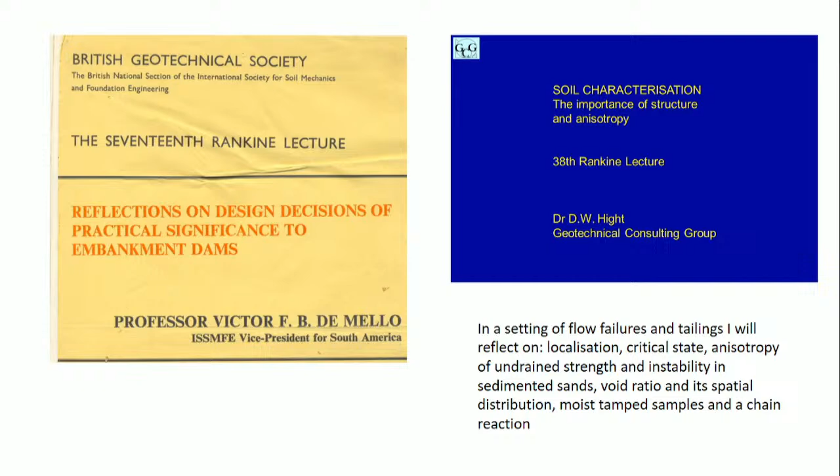Lewis and Tiago Diaz at my office, GCG, helped me find a quote from Victor related to tailings dams.

He said this in 1980, which is worth bearing in mind compared to what's happened since in the world of tailings. He said, 'To sum up, I allow myself to say that in the case of water dams, our experience has been so positive that the future invites the indispensable optimization of economics. On the other hand, when it comes to tailings dams, very justified are the concerns that, with time, the raises and the multiplication of diverse cases, the invitation to unpleasantness and failures is open and with a free ticket. We are only at the start, which favors us. Let us do the reconsiderations and revisions that the subject and the gravity of concern demand.'

I think this is pretty prophetic that he made that statement in 1980.

When I went back to my Rankine lecture, I realized how much speculation there was in it. In fact, I had some of the slides titled speculative. You'll recognize slides I've taken from the Rankine lecture because mine was the last lecture to be given using plastic slides, so they have the obligatory blue background.

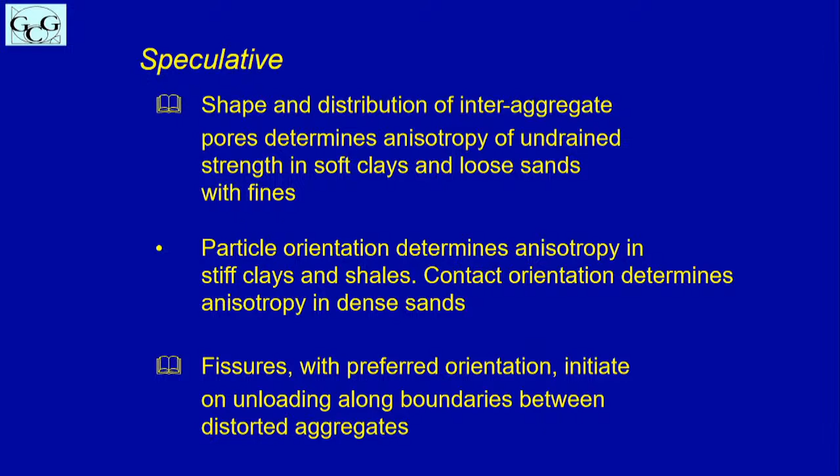Just to show the interest I had in those days with fabric, this was an SEM of the Bothkennar clay, the soft clay we tested at Imperial and various other universities. And I was always interested in these very large interaggregate pores that you can see both in the photograph and in the sketch.

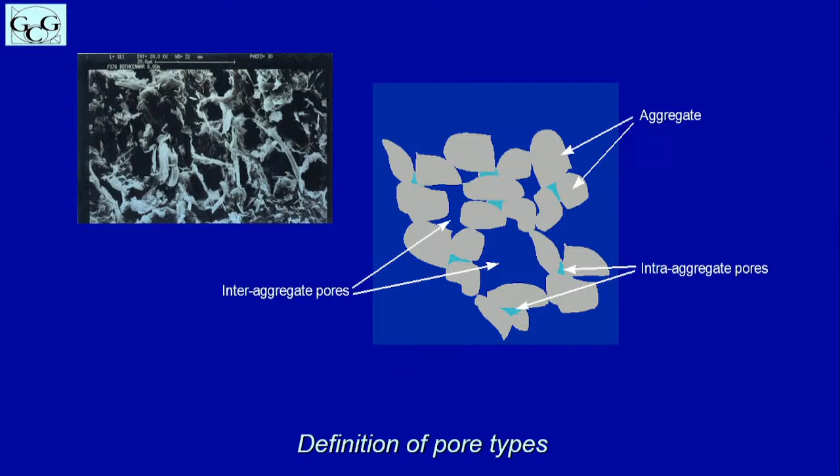It was this interest in macro voids and the void distribution that led me to suggest that it was this actual presence of the macrovoids in their shape that determined the anisotropy of the Bothkennar mottled clay.

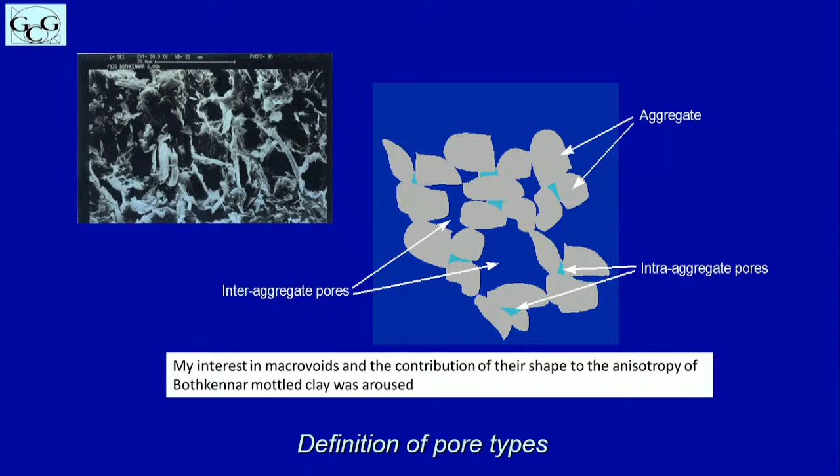For the benefit of a couple of ladies in the audience who won't have a clue what I'm talking about, I have these two diagrams. On the left-hand side, I have some densely packed spheres, and shearing of that dense packing requires particles to rise up and climb over their neighbors — this is dilatancy. Shearing of a loose packing on the right causes particles to nestle closer together — this is contractancy. The nestling together in Welsh is cwtch, I believe.

Thank you for the confirmation.

Another point that may be helpful is that shearing of loose and dense packings under the same confining stress ultimately brings the spheres to the same packing or density or void ratio. The voids between particles can be filled with water or air or a mixture of both. If filled with water that cannot escape when sheared, the pressure in the water increases if the packing is loose and tries to contract, and that pressure reduces if the packing is dense and tries to dilate.

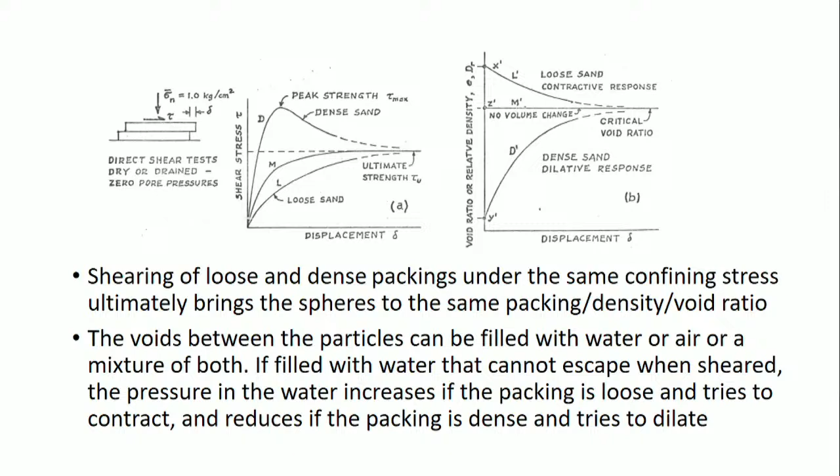So that's simplicity for soil mechanics, but the problem is particles are not spherical. They vary in shape and size. Their packing is not uniform at the same global void ratio. The figure on the top right is taken from a pretty old publication by a gentleman called Mogami, who shows that you can get two entirely different packings of the same number of particles, and you can introduce these macro voids. So the packing is not uniform.

Also, the soils have a fabric, an arrangement of particles that results in their properties being anisotropic, that is, varying with direction. The fabric, and so the anisotropy, changes or evolves during shearing. So we're not talking about a constant situation — as we shear, we change the properties.

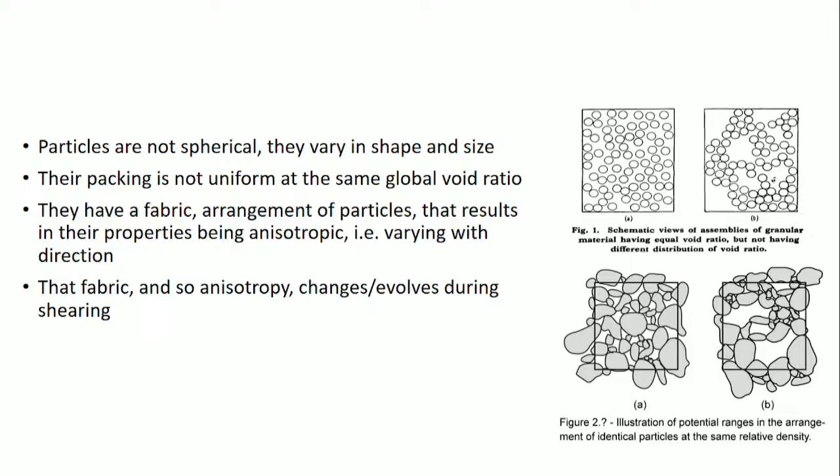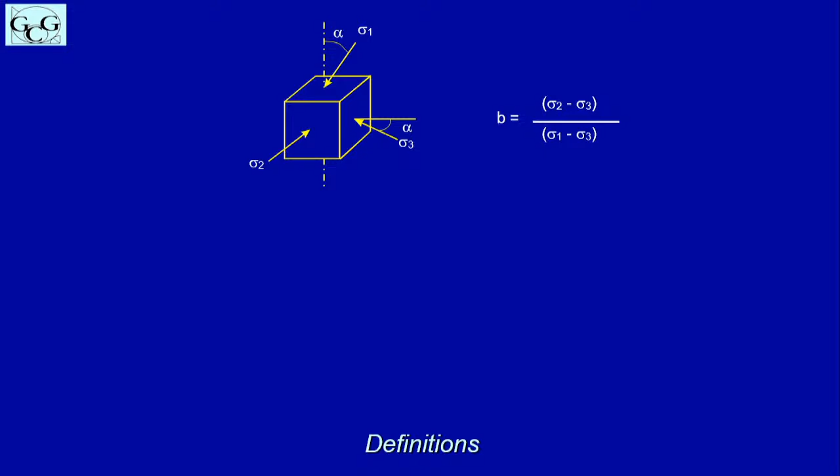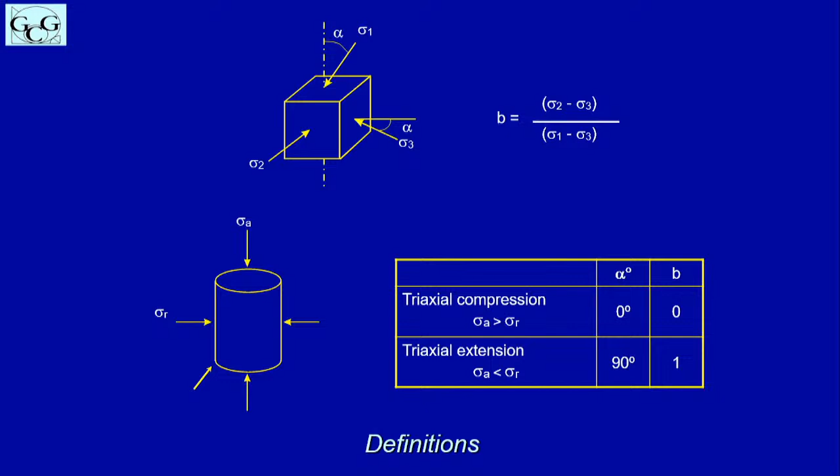So the same definitions I used in the Rankine lecture, I'll use now. The major principal stress, sigma 1, is at an angle alpha to the vertical, and the relative size of the intermediate principal stress, sigma 2, is given by the parameter small b. In a triaxial compression test, which we'll talk about, alpha, the major principal stress direction, is 0 — it's vertical — and B is 0. In triaxial extension, alpha is 90 degrees and B is 1.

Discrete element modeling predicts the displacements and rotations of discrete elements which represent idealized rigid soil particles. It provides information on forces at particle contacts, and the development of strong force chains or load columns. It enables explanations of macroscale observations in terms of particulate microscale behavior. It provides reassurance on the validity of observations made in laboratory tests on soils, such as phase transformation, and the effects of B and alpha, as observed in the hollow cylinder apparatus. It gives confidence in our understanding of instability and critical states. It supports intuition, and it corrects speculation.

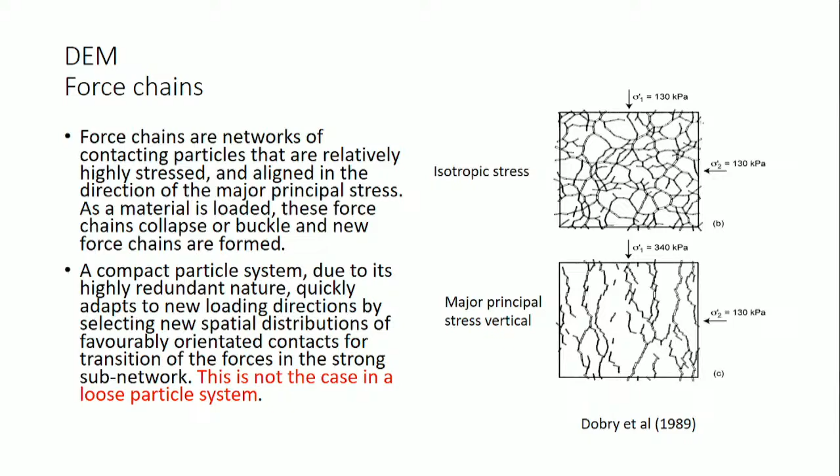Work done by Barreto showed that these force chains vary as you vary the parameter B, the value of the intermediate principal stress. So the value of B influences the force chains that develop because of its changing effect on the lateral support to the force chains. This is valuable when trying to understand what happens at critical state.

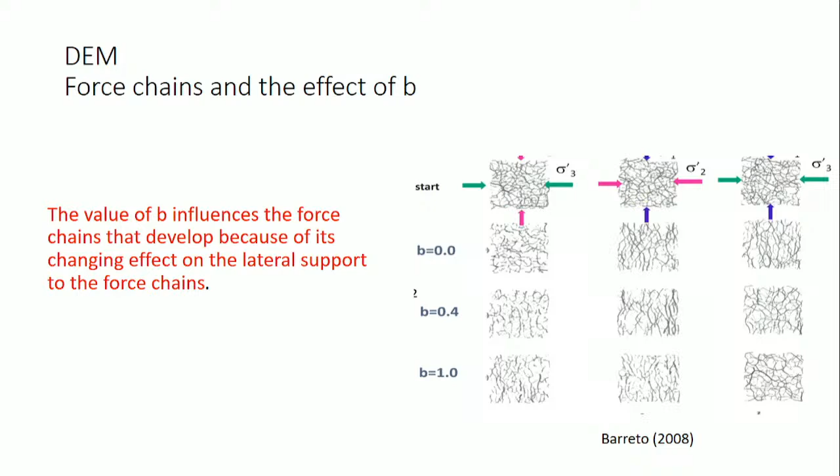The quasi-steady state. In the late 70s at Imperial College, a research student, Dr. Mustafa El-Gamrawi, was sent back to repeat his tests 2 or 3 times by the learned professor there, who didn't believe what he was observing in terms of what we now refer to as the quasi-steady state or the phase transformation.

A 2D DEM study by Yang and Dai shows that the quasi-steady state is a real behavior rather than a test-induced phenomenon. It's a transitional state in which spatial rearrangement of discrete particles sheared under constant volume conditions leads to the average number of contacts per particle decreasing to a minimum value before increasing gradually, and after that to an approximately constant value at large deformations associated with a steady state.

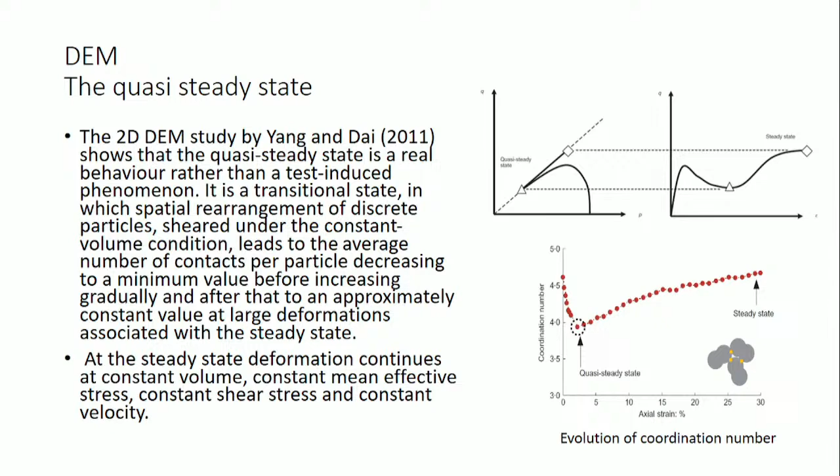At the steady state, deformation continues at constant volume, constant mean effective stress, constant shear stress, and constant velocity. So his work really reinforced what we thought we knew from our experiments.

I'm going to refer to the insights that it has provided on strain localization and particle movements during shear.

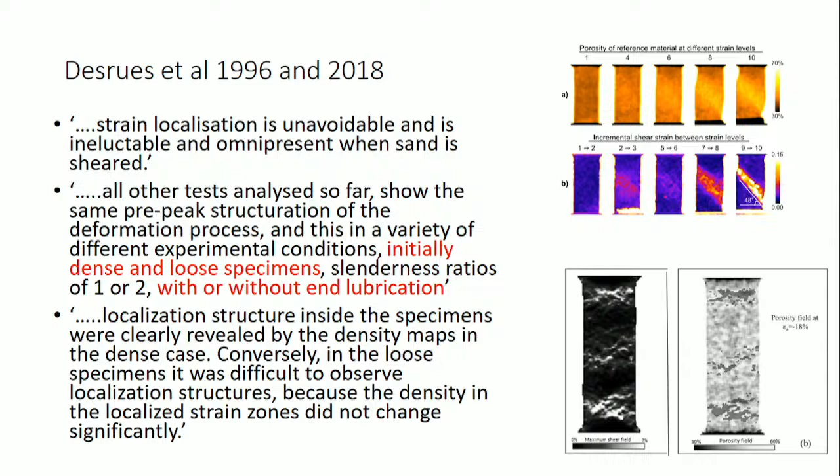He also pointed out that localization structures inside the specimens were clearly revealed by the density maps in the dense case. Conversely, in the loose specimens, it was difficult to observe localization structures because the density in the localized strain zones did not change significantly. So it's not to say they're not there. In fact, they are there—it's just more difficult to observe them.

So what does localization mean? Well, in dilatant soils—soils sheared from a dense state—dilatancy concentrates in a shear band, causing weakening in drained and slow undrained tests when pore water is drawn into the shear band. In fast undrained tests, pore water migration cannot occur and undrained strengths are higher. This was pointed out by Sandro Sandroni in 1975.

In drained tests involving dilation, decreasing stability is accompanied by reducing coordination number. The contacts are diminishing.

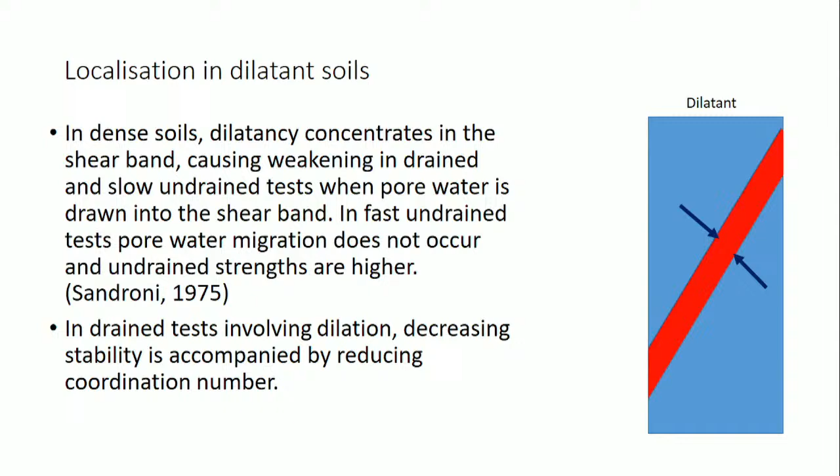But it's important to accept that localization occurs in contractant soils too. Localization does develop in loose contractant soils, but it's difficult to observe, and it's self-healing in drained and slow undrained shearing, when locally higher pore pressures can dissipate out of the shear band. Under rapid undrained loading, the shear band cannot drain. Straining is concentrated in the band and the strength is reduced.

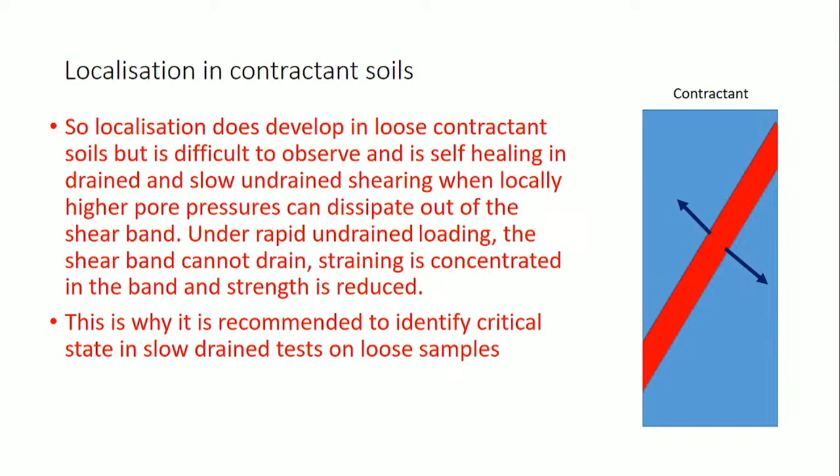This is why it's recommended to identify critical state in slow drained tests on loose samples, where the effects of localization can be minimized.

On the top right, the two figures compare DEM predictions of localization. The one marked A is a test carried out with end restraint, without lubricated ends. The test on the right is idealized testing of the same material, with lentil-shaped grains, showing that there is some localization, but much less when you don't have end effects in your triaxial test and when you're not using mixed boundaries.

The bottom diagram is pretty typical of what happens in triaxial compression. Shear banding of standard-sized triaxial samples can be distributed to such an extent that the sum of all the mechanisms does not show up in observations of the outside of the specimen. The more or less cylindrical or barrel-like shape of the axisymmetric specimen strained in laboratory tests may conceal internal complex structures involving strain localization.

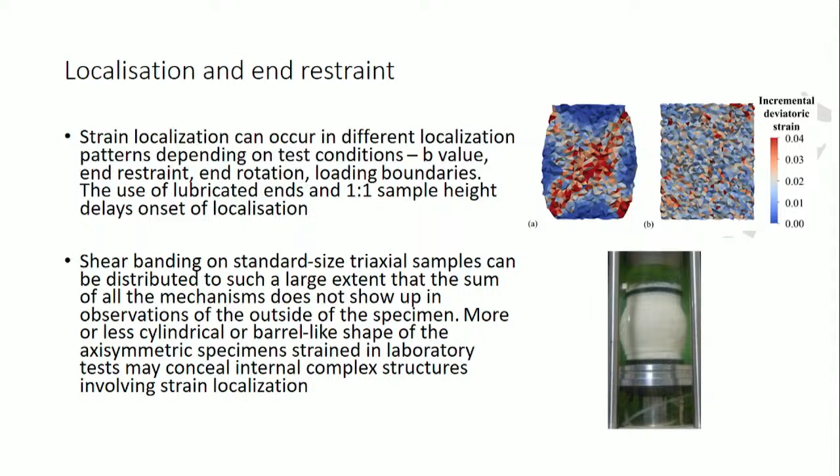That's effectively another quote from Professor Desrues. So what are the triggers for strain localization? Is there any stage we can look at where we're not impacted by it?

Non-uniform dilation or non-uniform pore pressure generation and equilibration can be a trigger. Stress non-uniformities associated with boundary conditions, end restraint, mixed boundaries, platen rotation, eccentricity in vertical alignment, stress concentrators such as fissures or other flaws—and I've highlighted the next one, heterogeneity: initial and evolving variations in void ratio. If you're testing a sample which doesn't have uniform void ratio, you almost certainly will have localization. What I want to show later is that you always have these non-uniformities in void ratio.

Failure of a local strengthening agent, such as cementing, suction due to menisci, negative pore pressures leading to cavitation—they can all be triggers. Orientation of platy particles can lead to localization. Loading direction, as we'll see, is important, and grain rotations seem to be a trigger for strain localization.

I just wanted to mention this statement from a piece of work by Wang and Gutierrez. They said that global failure along the primary shear band prevails when the specimen length scale and length-to-height aspect ratio are small, while progressive failure becomes more likely when the specimen length scale and aspect ratio become larger. So localization introduces a scale effect.

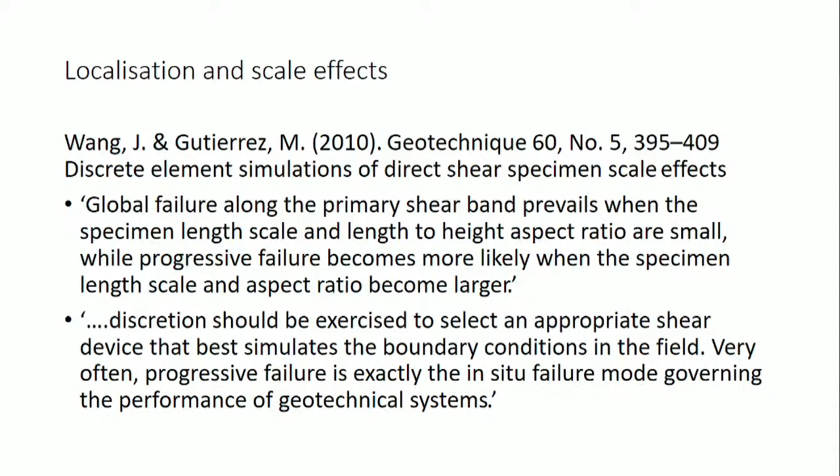They went on to say that discretion should be exercised to select an appropriate shear device that best simulates the boundary conditions in the field. Very often, progressive failure is exactly the in situ failure mode governing the performance of geotechnical systems. This is interesting because we spend our lives trying to avoid localization by using end lubrication, by doing all these clever things. They're now suggesting don't bother, just run tests where you get localization and try to interpret the data from those. I'm not sure.

So, changing topics now to critical state. I want to look at: is the critical state line nonlinear in E log P dash space? Does it depend on this parameter B? Does it depend on alpha? Is it actually attainable when you take into account particle shape and packing?

On the left is the data published by Verdugo showing phase transformation lines and the ultimate steady state. He found that it wasn't a straight line in E log P dash, it was curved, the curvature developing as the void ratio increases, as the material becomes looser. But I want to point out that he ran these tests on moist tamped samples, and I'm suggesting that at those high void ratios, there is important void ratio spatial distribution.

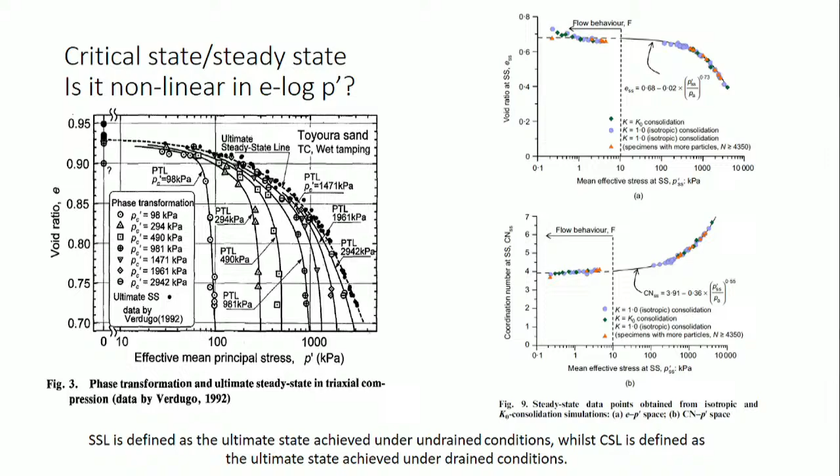This finding was confirmed by DEM work shown on the right-hand side by the group in Western Australia. So that's encouraging that the surface is curved. So I will adopt a curved surface later on.

Does it depend on B? Well, we talked about force chains. Force chains exist at critical state. They've been observed again in DEM studies. So it's reasonable to assume that the critical state depends on B. At critical state, force chains continuously form and collapse and reform. So at critical state, there's simultaneous dilation and contraction.

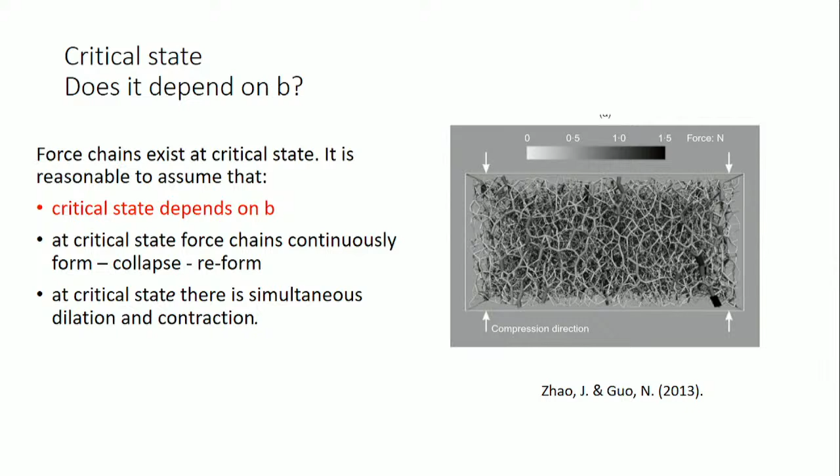However, some more work on microcomputed tomography suggests that actually there is no difference. If you can look inside the shear zones, the shear bands that are occurring, then the critical state lines come together, as opposed to the dark points being two separate critical state lines, one for compression, one for extension. The upper solid line is formed when looking inside these shear zones and measuring the void ratio. I'm still not convinced by this, but I'm not sure you know exactly what's going on in those shear zones in terms of the B value.

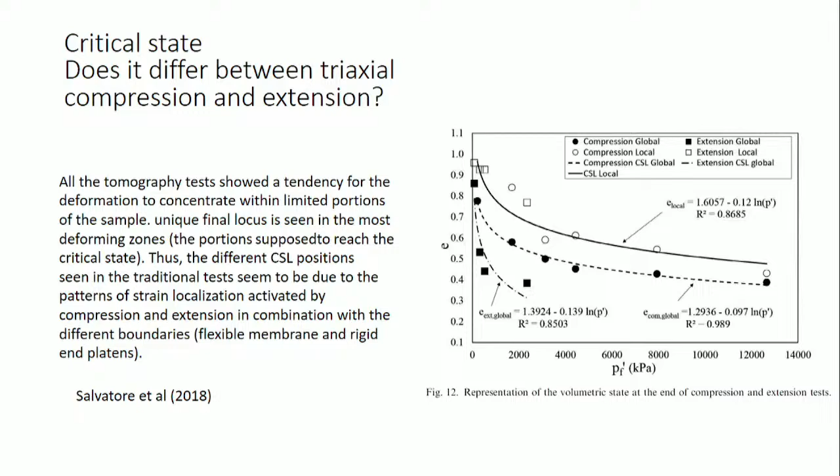Does critical state depend on alpha? These are some pictures of particle orientation at a very high shear strain of 400% from Carrasco et al. And it's very clear that at critical state an anisotropic fabric develops. Elongated or platy particles align relative to loading direction, as do load columns, even in shear zones. If the loading direction is changed, for example if you decide to rotate the principal stresses at critical state, the particles must reorientate, and the soil must undergo volumetric deformations to reach a new critical state. But is this feasible? Pre-existing particle arrangement can dominate subsequent behavior, and we'll look at that when we look at the effects of bedding in a subsequent slide.

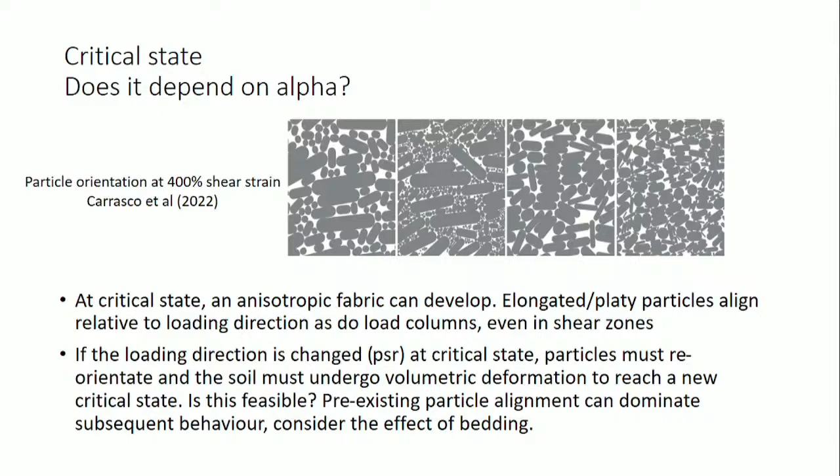So continuing this question, is it attainable? If you consider localization, the early work by Professor Desrues in 1996 said that critical state is particularly well verified inside the observed localized band of deformation rather than the average of a complex strain field. Using his microcomputed tomography, he was able to look inside the shear bands, and he found that the curves came together for these loose and dense samples. The work was only done in triaxial compression.

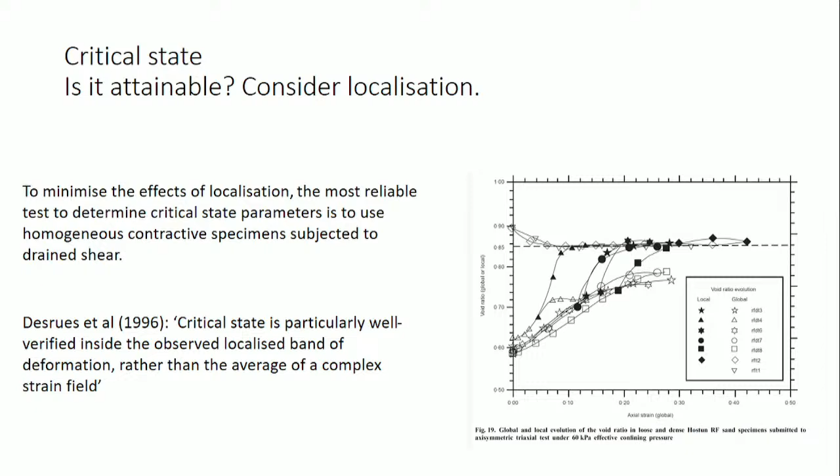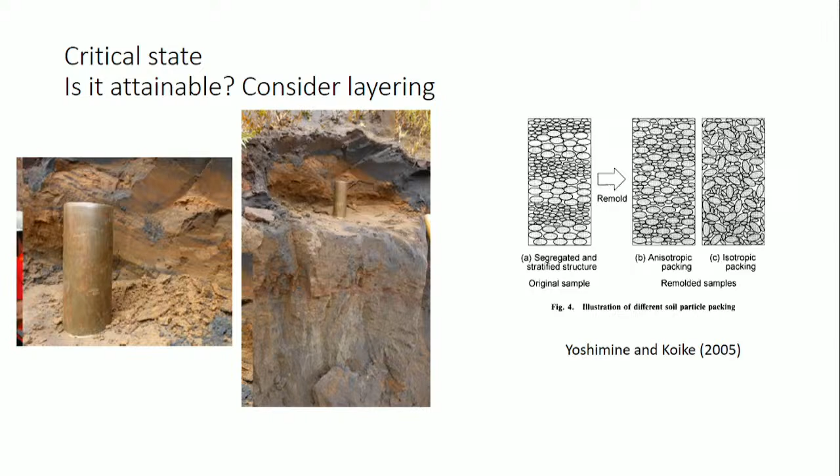So let's look a bit more closely at layering and what happens. I'm looking at work published in 2005 by Professor Yoshimine and his colleague.

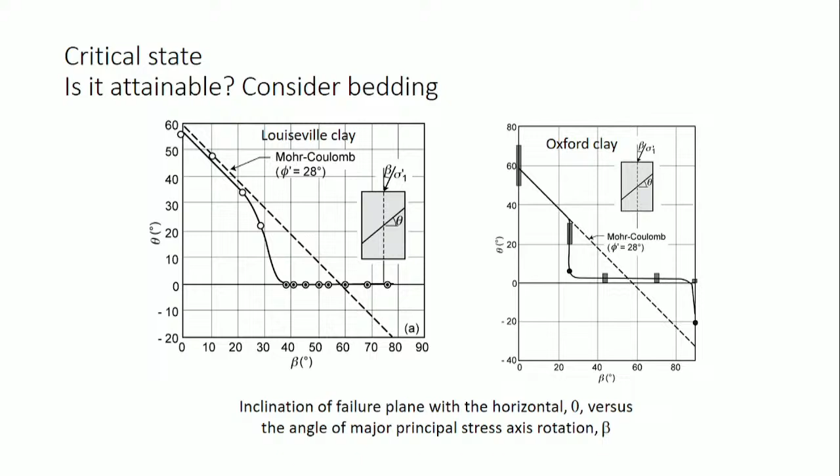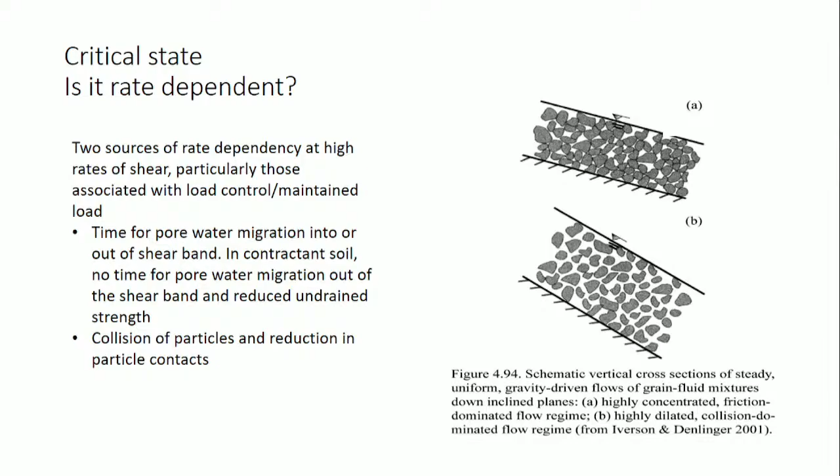Why don't we do more load-controlled testing? Because that's what's so much more relevant in the field. I looked at what people said about this, and I kept coming to the statement that deformation-controlled loading has been recommended in the past to allow post-peak behavior to be observed. Well, that's the post-peak behavior under strain-controlled loading, not the behavior we should be interested in in many cases. And the strength in these load-controlled tests is pretty poorly defined, yet that's the one we're interested in for certain methods of analysis. Going back to the work of Professor Wade, he said that only an inertial system can capture the true strain-softening response of sand.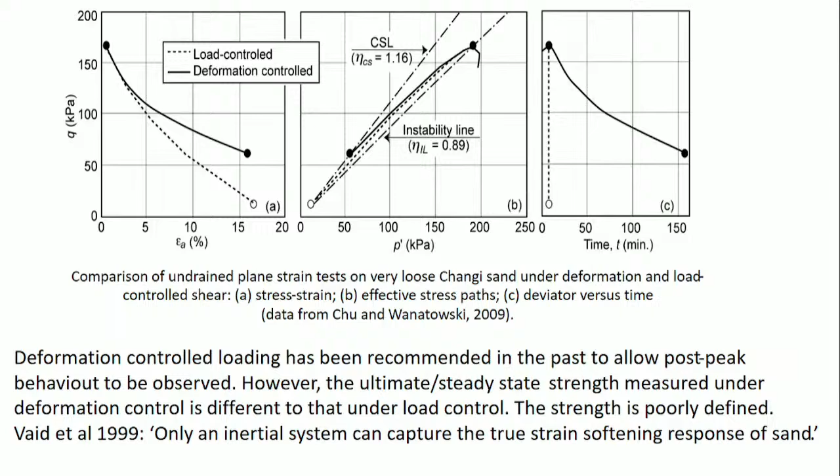Okay, back to the Rankine lecture now, just for a couple of minutes, on anisotropy of water and air pluviated loose sands in undrained shear. This was data we published, it was in Satoru Shibuya's thesis in 1985, where we tested water-pluviated Ham River sand in the hollow cylinder apparatus, shearing it with different directions of the major principal stress to the vertical. The numbers on the right are the values of alpha in degrees. These tests were run with the parameter B equals 0. So you can see a major influence of the principal stress direction when you're shearing these sands.

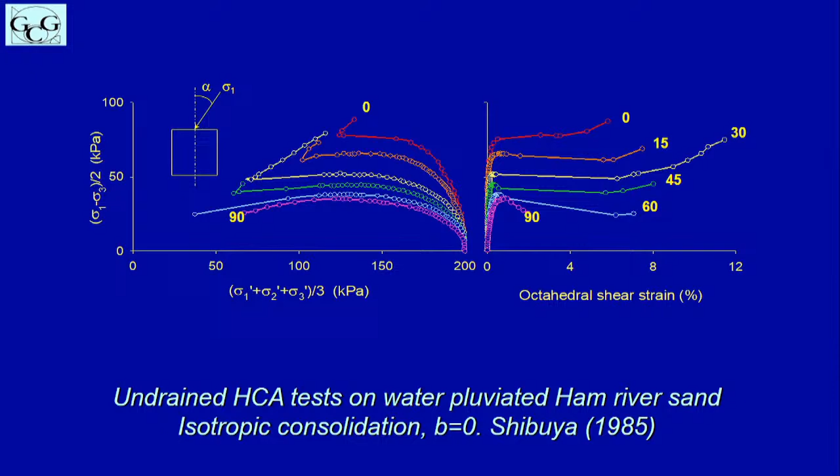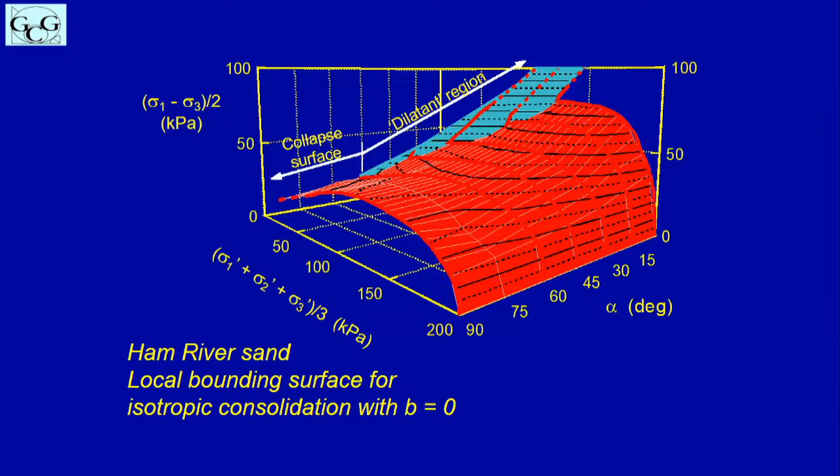The other thing we suggested at that time was to stack those different effective stress paths together in a three-dimensional space, so that you can actually identify what we then called the collapse surface and the dilatant region.

That slide was actually presented in the Rankine lecture in 1998. 1998 was a bumper year for data on hollow cylinder tests. I've just taken two of them. This is data for Toyoura sand, published by Yoshimine in 1998. He did this test with a B equals 0.5 and found exactly the same pattern of behavior that we'd found in the Ham River sand.

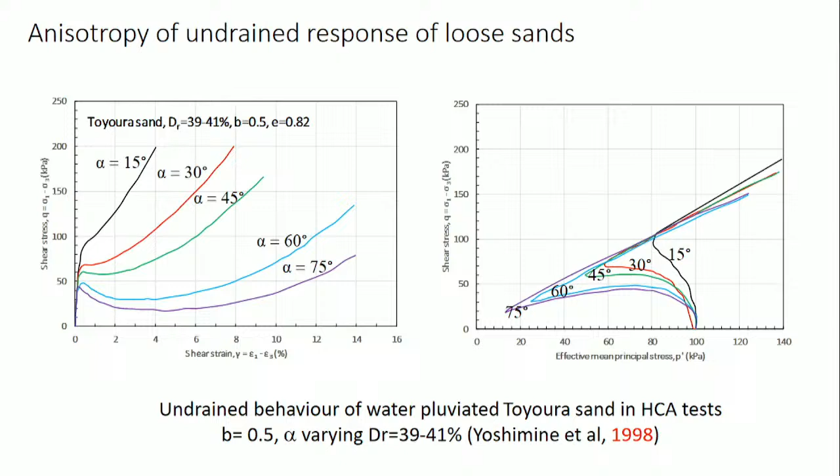If you look at the stress strain curves on the left, and compare the tests at alpha of 15 degrees against the one at alpha of 75 degrees, it doesn't seem likely that they're heading for the same critical state. But of course, they're not going to get to the critical state because of localization, which is inevitable in the hollow cylinder tests.

Another set of data, this time from one of Vaid's students, showing again the same pattern on a different sand at different relative densities.

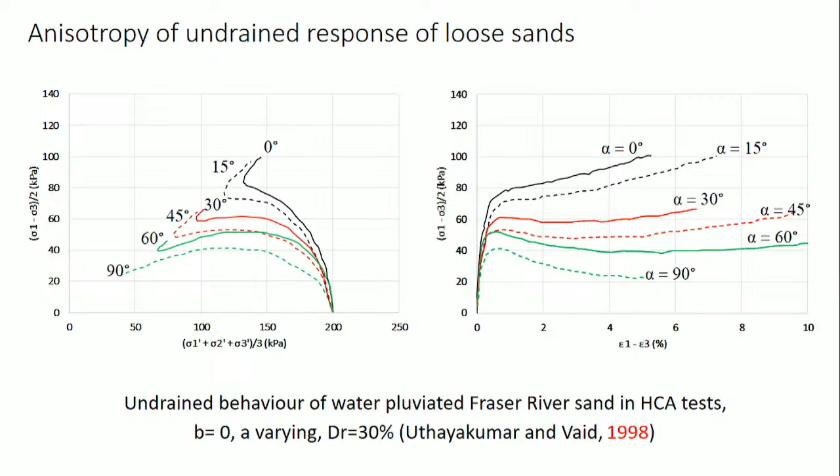So another one of my speculation slides: geomaterials show anisotropy of stiffness, strength, collapse potential and permeability because of anisotropic fabric, structure and stress state. Anisotropy evolves as fabric changes and is different at small and large strains. Anisotropy is induced when fabric changes are permanent. Anisotropy of strength arises from directional dependence of volume change characteristics and/or of the failure envelope.

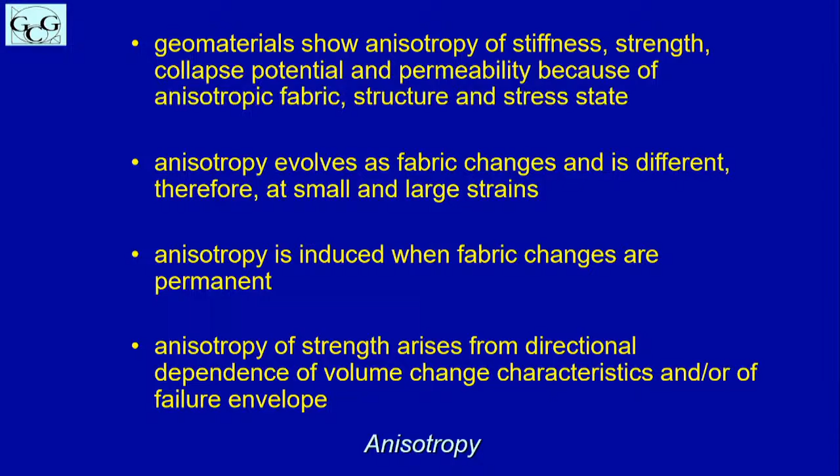A piece of DEM work that was of interest to me was looking inside a hollow cylinder sample when it was tested, and looking at how the porosity changed in that sample as it was sheared with the principal stress at, in this case I think, 45 degrees to the bedding. You can see that concentrations of porosity develop, but they're really not particularly well developed until we are at failure, at peak.

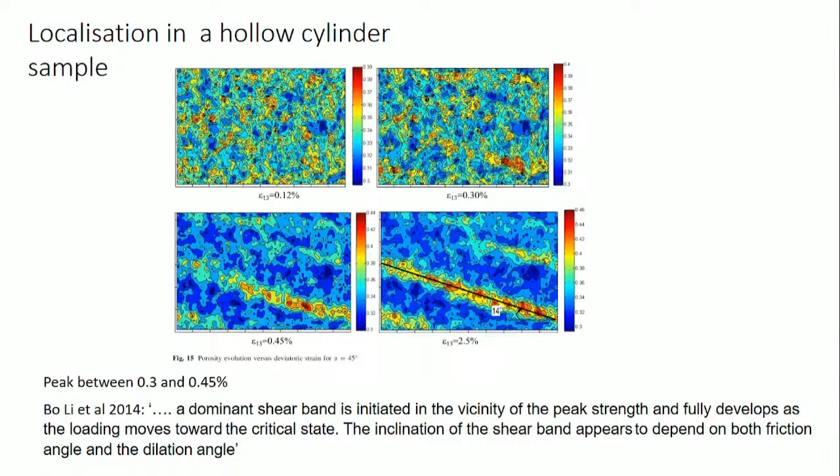So it's encouraging that at least we can use the hollow cylinder data to look at this pre-peak behavior, or up to the point of instability, which brings me on to instability and collapse surfaces.

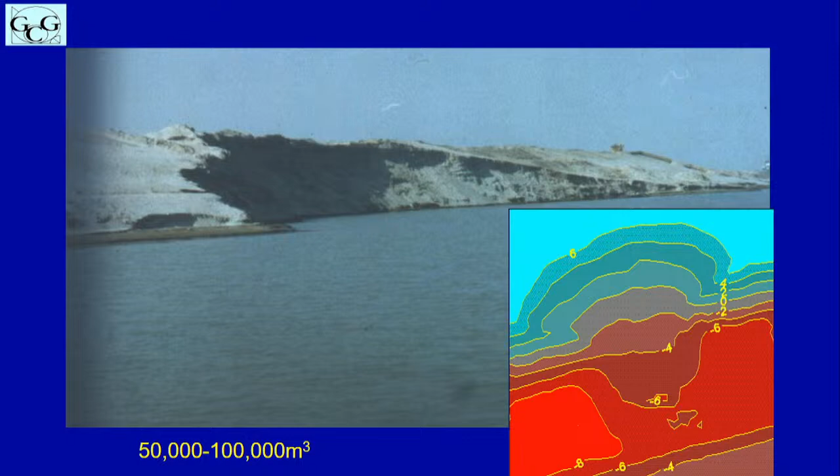We then applied some shear drained to different levels and then turned off the drainage. We found that there was a stress level that we could apply, in this case up to a shear stress of 36 kPa. At that point, as soon as we turned the drainage off, the sample collapsed. So that point would correspond to a slope angle of, I can't remember now, 15, 20 degrees, something like that. That's the data on the left that we just looked at.

We put that data together and suggested the existence of an instability line that divided unstable and stable behavior. What we didn't know at this time was that this subject had already been deeply studied by Professor Lade, by a gentleman called Sladen, and others. That's the danger of not being involved in research yourself - you tend to stray into the experts' fields, and I should have apologized to those people at the beginning.

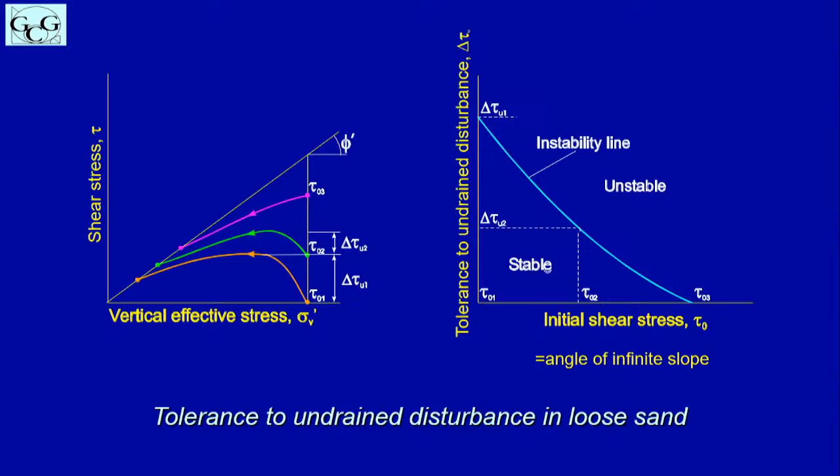So once we'd got that curve, we could suggest a slope angle for the infinite slope that could then be dredged, and that was done.

As I said, instability has been looked at by many people. This is work done by, again, Chu Jan. These are triaxial compression tests. On the left is the effective stress paths for samples tested at different global void ratios. The peak point of those effective stress paths - we have a line passing through those, and in this case passing through the origin - and that was defined as the instability line. The instability zone, of course, should end up at the critical state and is a zone between the instability line and the critical state line.

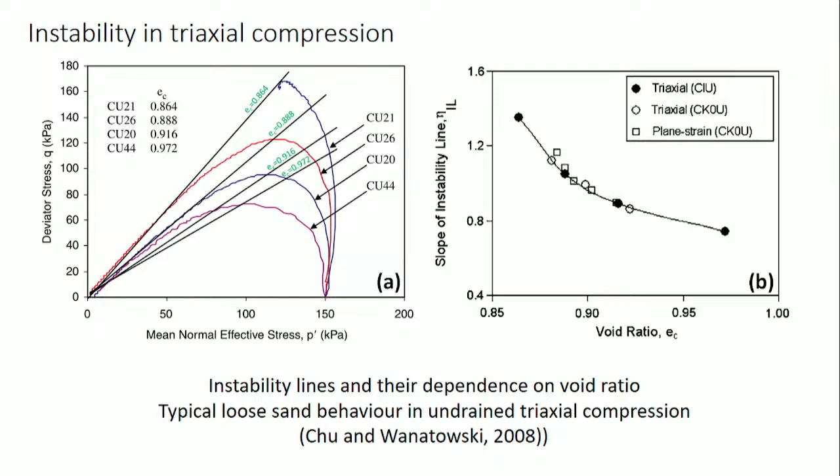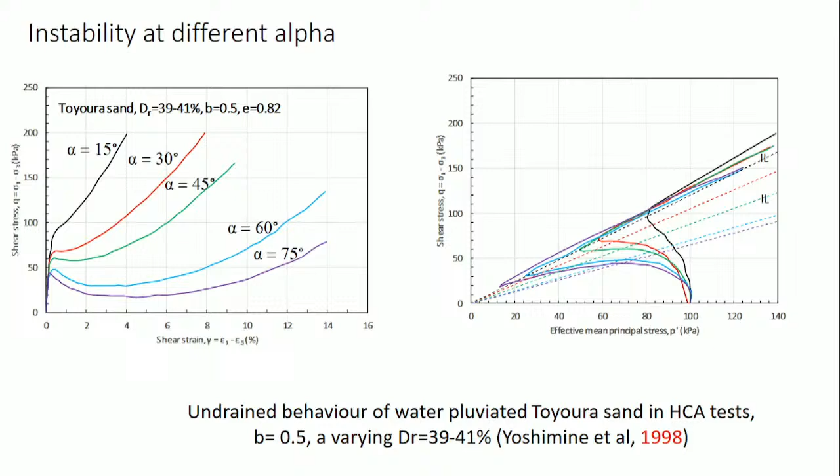Chu Jan showed that the slope of the instability line depends on void ratio, global void ratio. So if you go back to our hollow cylinder tests, and now look at the effect of principal stress angle, principal stress rotation, and just put these instability lines on those curves - I've done it for the Toyoura sand and the Fraser River sand. It's the same figures you've seen, but now with instability lines added.

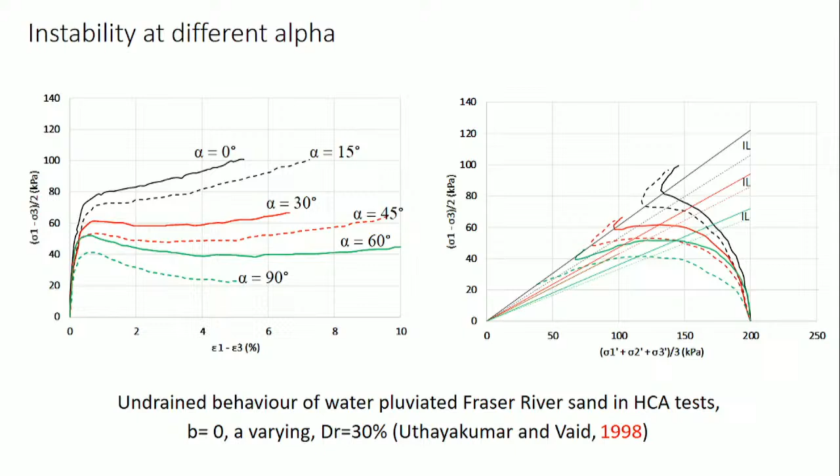You can see on the right-hand side, the slope of that instability line reduces as the alpha value increases, in the same way that the instability line is affected by void ratio. So you've got two factors to consider: the change in void ratio and the change in principal stress direction.

Two other things we did at that time, trying to look at what might happen in those slopes. We ran drained and undrained tests on samples that had been anisotropically consolidated. The pink line shows the drained test that collapsed somewhere near this collapse surface that we identified.

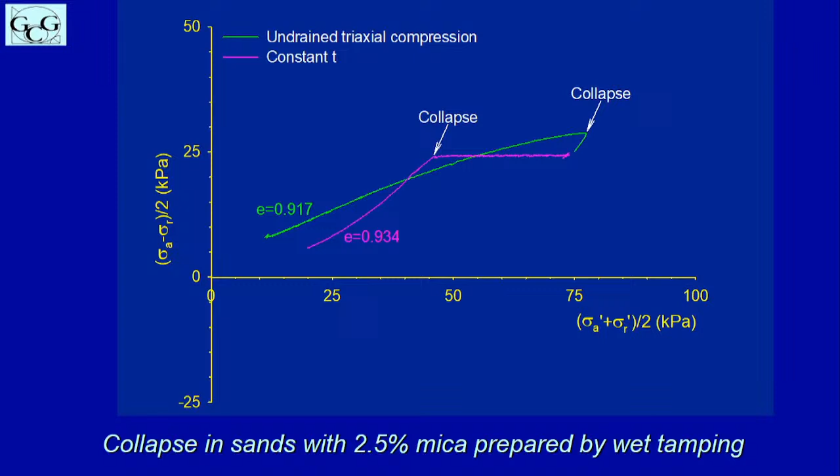So putting that data together, we could define when collapse was likely to occur. Obviously in these loose sands, it would occur under undrained loading, which is the pale blue. It could also occur under drained loading if that drained loading is not carried out under strict strain control. If it's under strict strain control, you can actually pass through the collapsed surface and develop high strains.

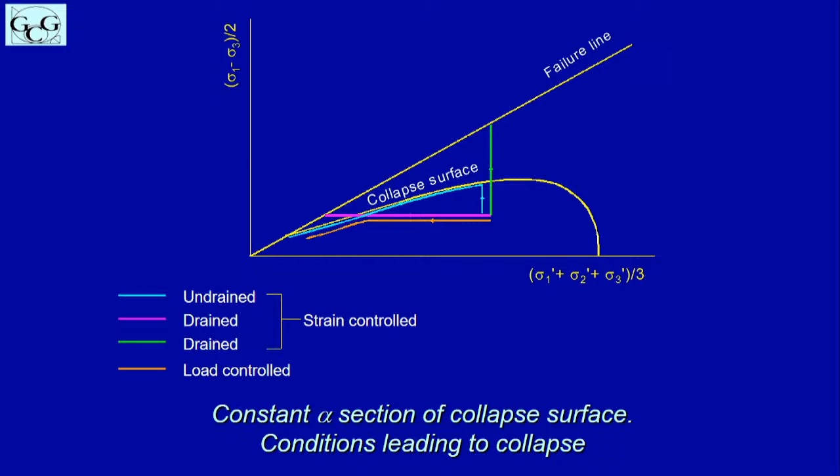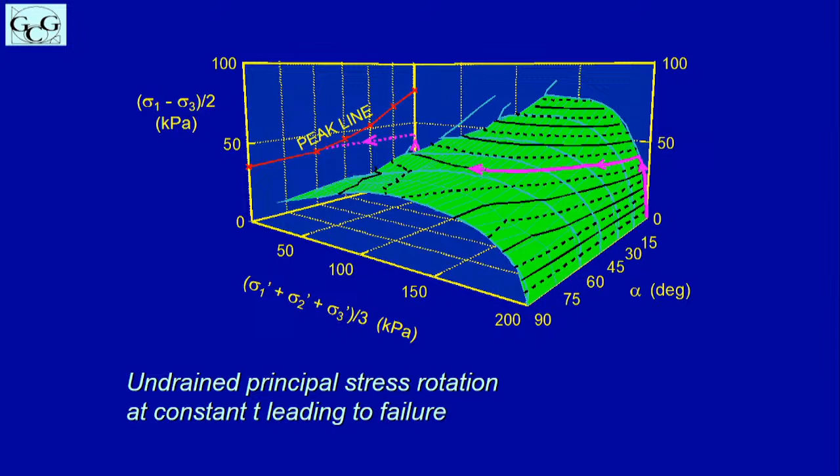And going back to our earlier hollow cylinder data, we'd shown that simply rotating the principal stress directions could bring about collapse.

So instability occurs before there is full mobilization of shearing resistance. The instability line inclination varies with void ratio, shearing mode, and direction. The instability line is least affected by localization because it occurs at small strains before particle rotation sets in.

Instability can be triggered under undrained, drained, and partially drained conditions. However, under undrained conditions, only very loose sand can become unstable. Drained instability occurs when there is a reduction in effective mean stress for both loose and dense sand. Instability can also be triggered by undrained rotation of principal stress directions at constant shear stress.

Now, a little bit about void ratio. We rely heavily on measurements of global void ratio and pressure. I'm just showing the classic data from Verdugo, which on the left-hand side shows the dependence of behavior in undrained triaxial compression on void ratio, and on the right, the importance of stress level at constant void ratio.

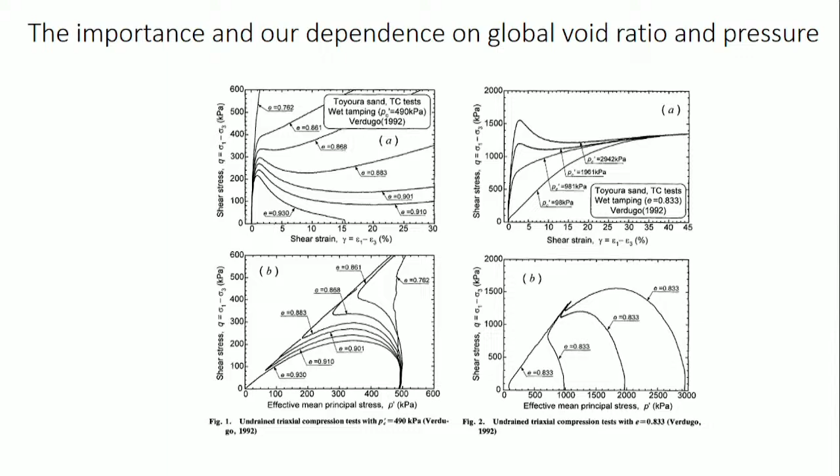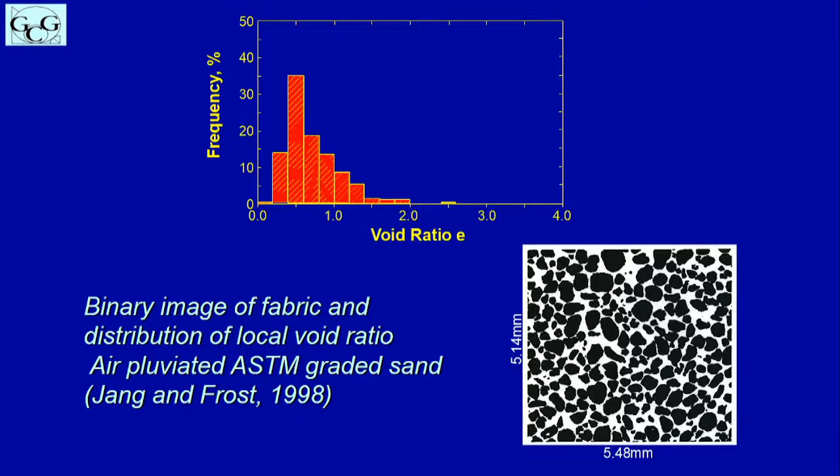But again, in the Rankine lecture, I've been fascinated by the work that Professor Frost was doing, looking at void ratio variations. He had to work with medium dense samples because he was using impregnation to look at void ratio variations, and he showed that there were fairly large variations in the void ratio in these samples, much higher in moist tamp samples than in air pluviated samples. At the time, I wondered if this fact was related to the different behavior we saw in moist tamped and air pluviated and water pluviated samples.

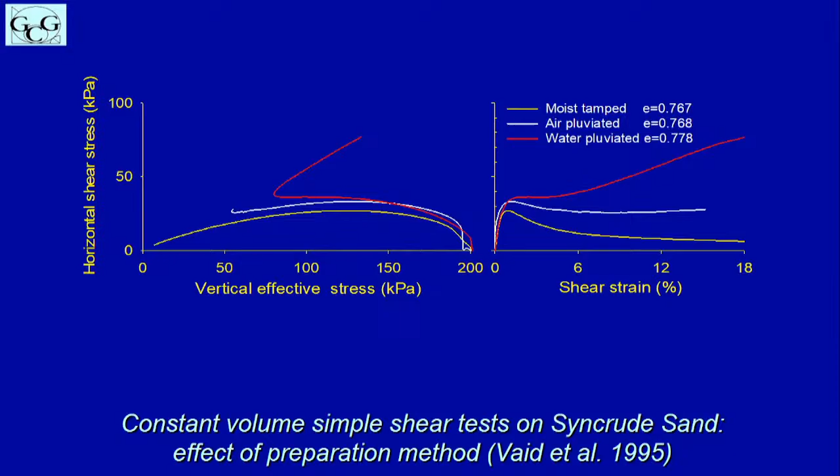And I used the data from Vaid on Syncrude sand to question it. But taking this further now and looking inside some loose samples, this again is on the left, some micro-computed tomography where the void ratio was examined in detail, and on the right a DEM model. And again, you can see that the void ratio is not constant. It varies fairly considerably, and particularly increases on the high side.

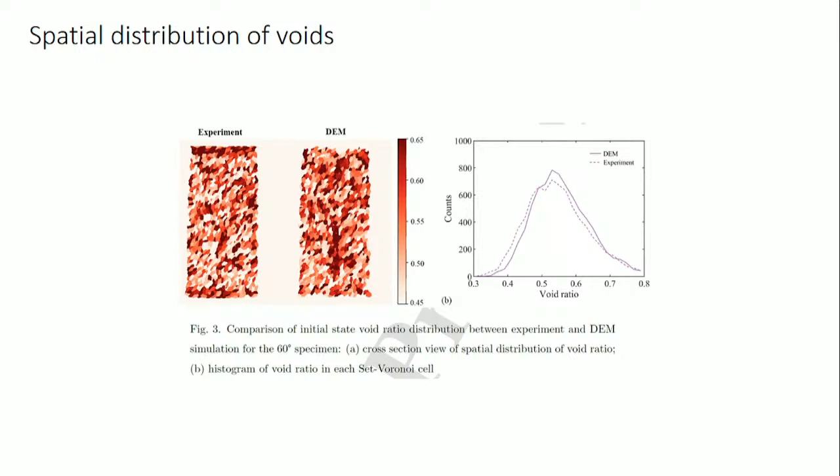So that was the syncrude sand data. A very nice publication comparing air pluviated and moist tamp samples was published by Benahmed et al. in 2004, and again they showed this major difference. So two samples prepared with the same sand, but using different methods of forming the samples, showed quite different behavior, with no suggestion that those two tests would both reach the same critical state.

Why? Benahmed et al. produced some lovely photographs showing in A and B, the moist tamped samples, and you can see they're in clusters. There are large voids present. On the right-hand side is the air pluviated sample, the same relative density, showing a much more uniform distribution of voids. They produced this conceptual representation of the aggregate fabric in the lower two diagrams - the aggregated fabric of the moist tamp sample on the left and the homogeneous fabric, the same void ratio, on the right.

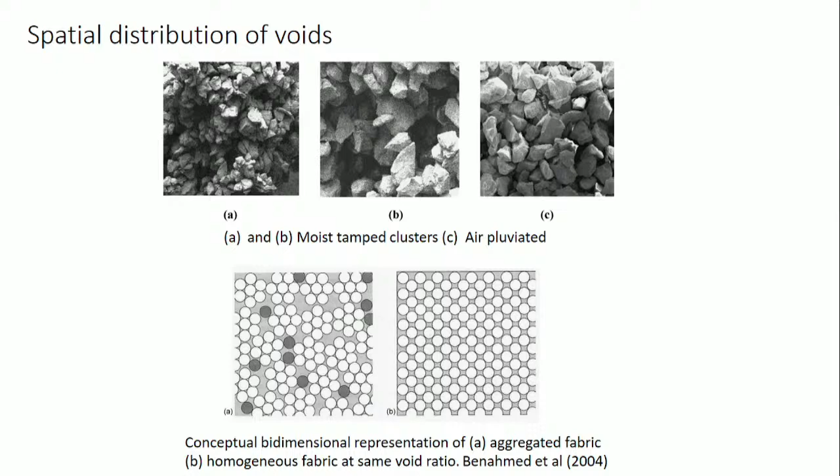Now if you take that conceptual picture that they produced, you can identify two zones: a local zone having a local void ratio of E1, and the other zone having a local void ratio E2. The E1 void ratio will sit, the state of that material will be within the instability zone - it's obviously waiting to be disturbed. The zone with the low void ratio would be outside the instability zone.

If you cause collapse for some reason of that open fabric, pore pressure will be generated, pore water will be pushed out of that sample into the neighboring material, and you will increase its effective stress, and it will then reach the instability line.

So that's looking at localization at a particle level. Pore pressures migrate under drained, partially drained, or expansive drained conditions to neighboring clusters. The increase in pore pressure in the E2 zone under constant or increasing shear stress and local undermining moves the state into its instability zone, and so collapse. So instability lines play a part in explaining the initial local collapse trigger and the chain reaction that follows.

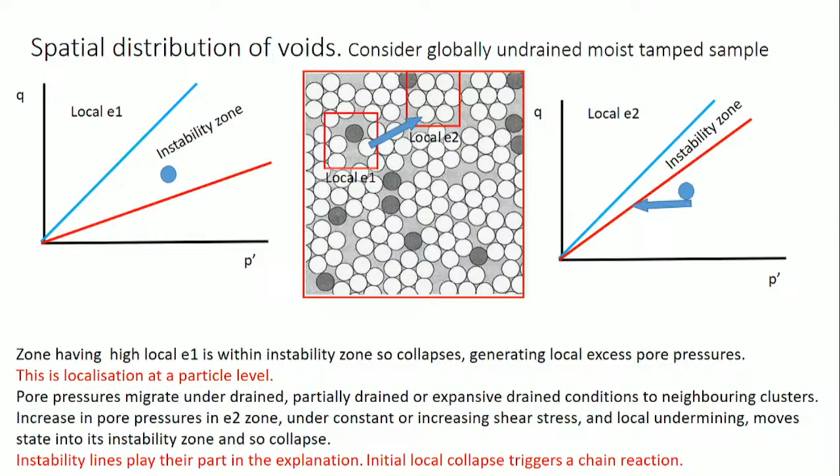Presumably a similar process occurs in the field, where there is spatial variability and void ratio distribution changing. At the field scale, localization will result in progressive failure because of the scale effect. Under maintained loading, the field, global, and even local conditions are more likely to be undrained. That's another reason for looking at load control.

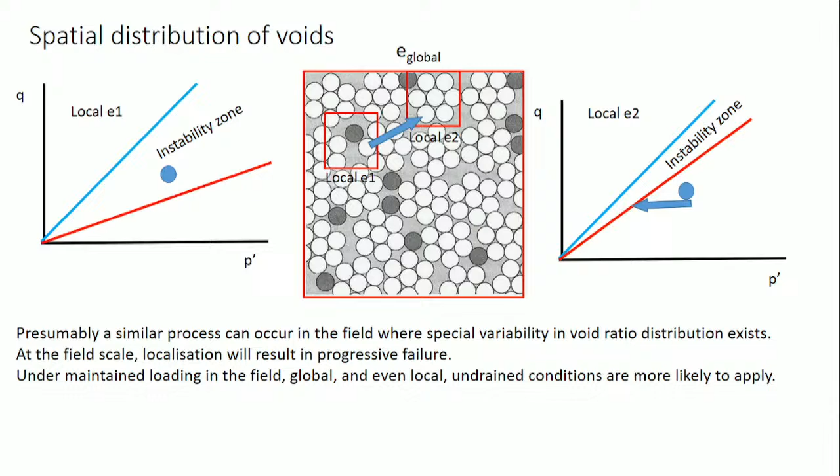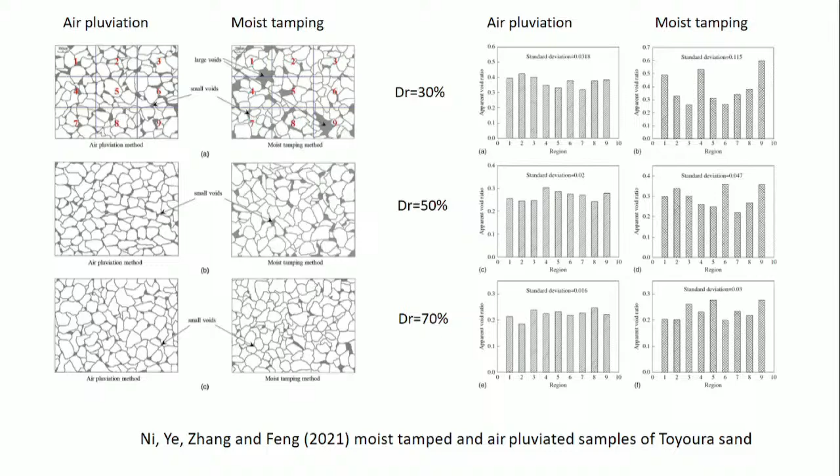Somebody else has done some work on moist tamp versus air pluviated samples, showing data from their paper here. The advantage was they looked at different relative densities: 30%, 50%, and 70%. What they showed is this difference in void space on the left-hand side, the much bigger void spaces in the moist tamp samples, and that's backed up by the plots on the right showing the variations in the different regions of void ratio. Those differences start to disappear as you increase the relative density, so it's a problem that applies to low relative densities, to loose samples.

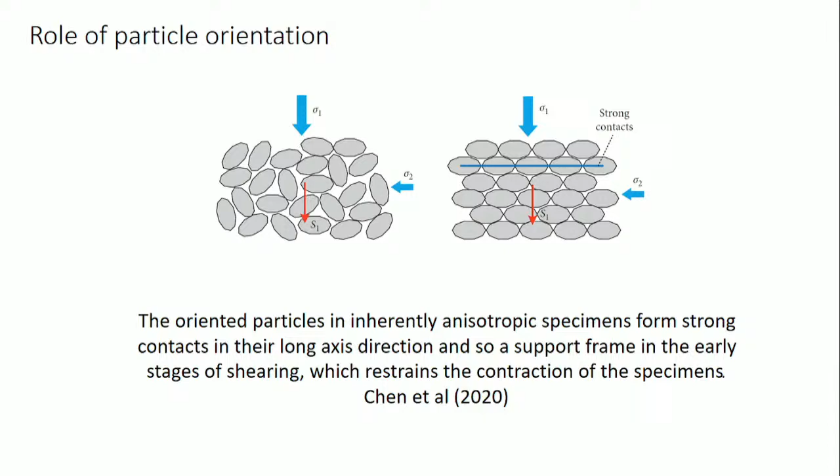Is that not enough to stop people doing moist tamp samples? Probably not.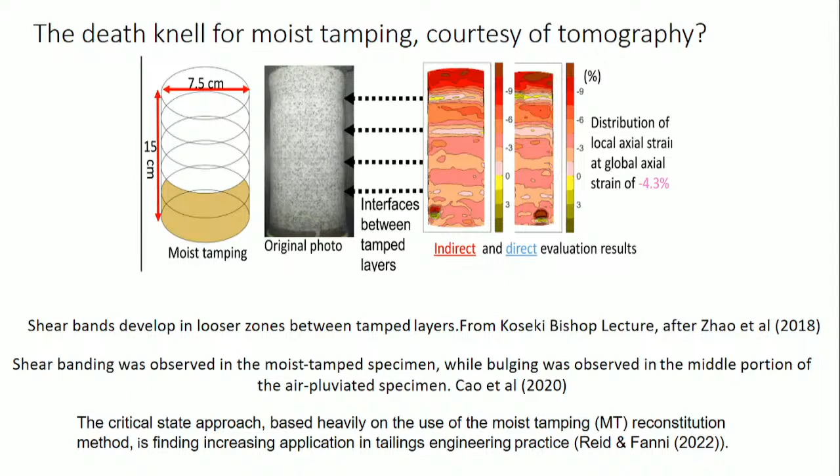The diagram I've got here was taken from the Bishop lecture by Professor Koseki, who also used CT tomography to look inside these moist tamp samples. He showed that shear bands develop in the looser zones between the tamp layers. So, you know, if you want to test unsatisfactory samples, then carry on moist tamping.

So, my concluding remarks: samples prepared by moist tamping or wet tamping are often tested when investigating the behavior of sands and sands with fines, including tailings. The resulting fabric of moist tamped samples does not match the fabric of sedimented samples having the same grading. Clustering results in a non-uniform void distribution and the presence of macro voids. The collapse potential in triaxial compression is exaggerated.

Classic investigations using moist tamped samples, such as those by Verdugo and by Chu and Wanatowski, require the conclusions for behavior at the high void ratios to be reconsidered.

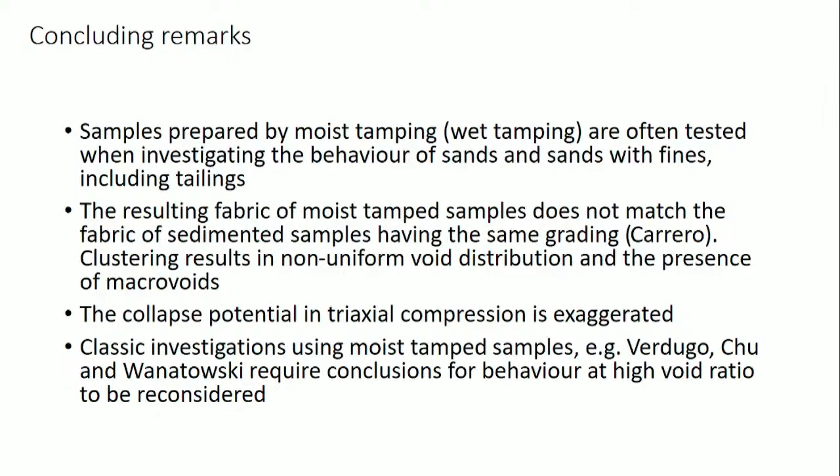Sedimented clean sands do not generally show a potential to collapse when tested in triaxial compression, but show a marked anisotropy of collapse potential when sheared after or during rotation of the principal stress directions away from the vertical. This anisotropy results from the preferred vertical orientation of contact normals during deposition and the development of vertical load-carrying columns during overburden loading. This situation can be modified by the addition of fines, depending on the shape and location of the fines relative to the load-carrying framework.

And we'll go back to the behavior of micaceous sands, which can introduce a collapse potential even in triaxial compression.

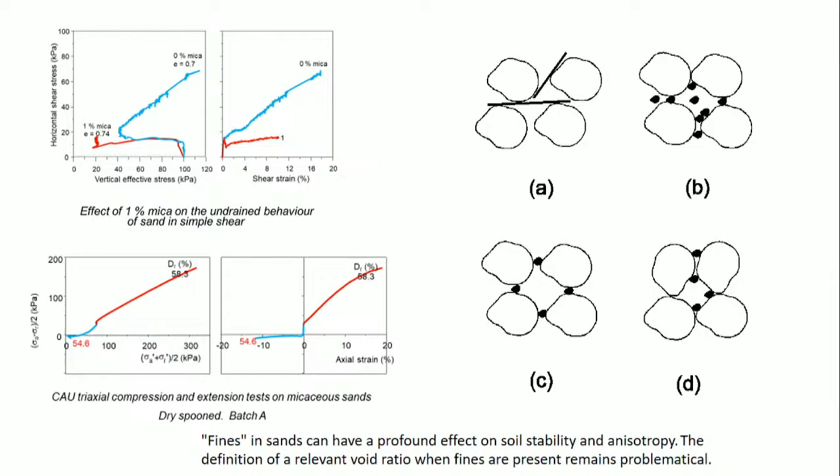So just to finish off, the parameters that are used to define the state of soil, such as void ratio, degree of saturation, density, water content, are at best average values. In natural soils and in reconstituted soils below a certain scale, the parameters vary locally.

Local variation in void ratio is particularly important in loose material. Macro voids can exist in natural and laboratory-prepared samples depending on depositional environment, including specimen preparation, and post-depositional processes, so stress and strain history. They're large enough to accommodate collapsing particles.

Fines can lead to macro voids depending on the shape of the fines and their location in the granular framework. Macro voids close first during consolidation and collapse first during shear. Spatial variability in void ratio distribution, determined by grain scale characteristics and formation history, needs to be taken into account when explaining observed behavior and predicting future behavior.

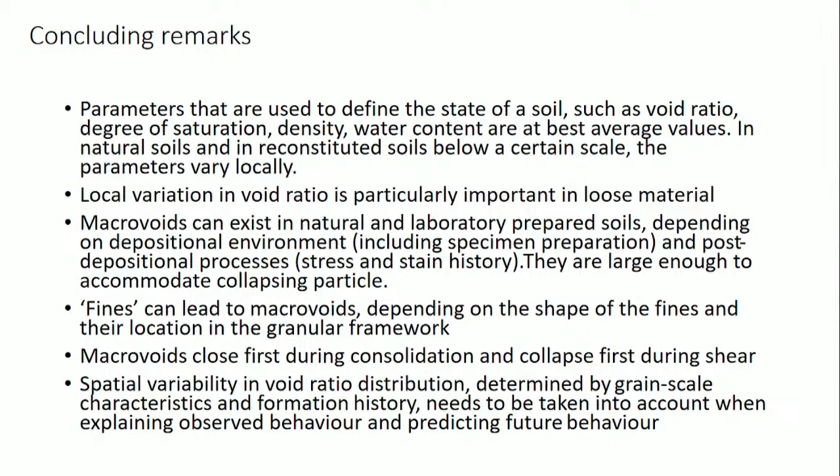So void ratio does not convey the fabric of the soil. It doesn't therefore tell us anything about the particle arrangement in terms of the distribution of the different particle sizes. It doesn't tell us about the shape of the particles, the orientation of particles and aggregates and their contacts, or the number of contacts per particle, the distribution and shape of void spaces, and the presence of discontinuities.

We need to think of something other than global void ratio to characterize our materials, obviously fabric. And fabric is determined by composition, depositional mode, and post-depositional processes, so stress and strain history.

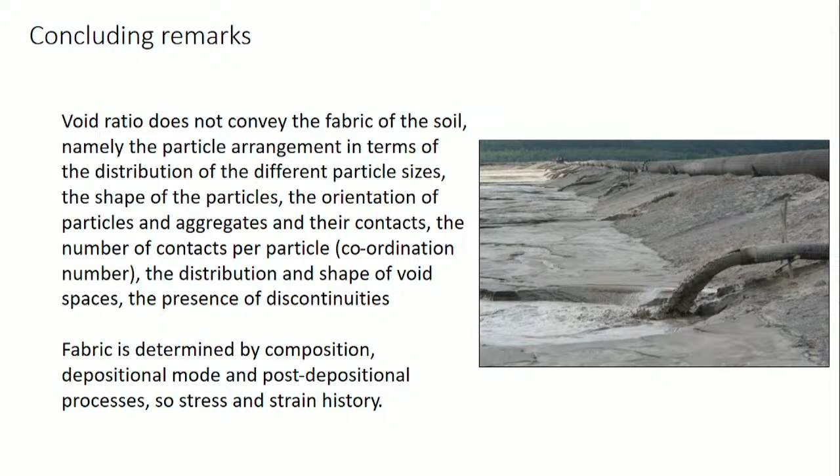Sorry, I thought I'd finished. Critical steady state is reached at large strains, and together with stress level and local distribution of void ratio, determines the form of flow in loose sand. Ultimate strengths are poorly defined under load control.

Instability, however, occurs at small strains prior to major particle rearrangement, and so before phi dash is mobilized. Reaching the instability surface determines whether flow will or will not occur. The instability line is least affected by localization. The zone of potential instability increases with increasing alpha and increasing global void ratio.

Behavior should be linked with the relevant local void ratio. Instability lines have a key role to play in practice, but must consider anisotropy.

What localization takes place in situ in sands and silty sands? We know what happens in the lab test, but we don't often know what actually is happening in the field. And remembering that suggestion that we should now start using tests which lead to localization, do the kinematics in the field actually match those in the laboratory tests?

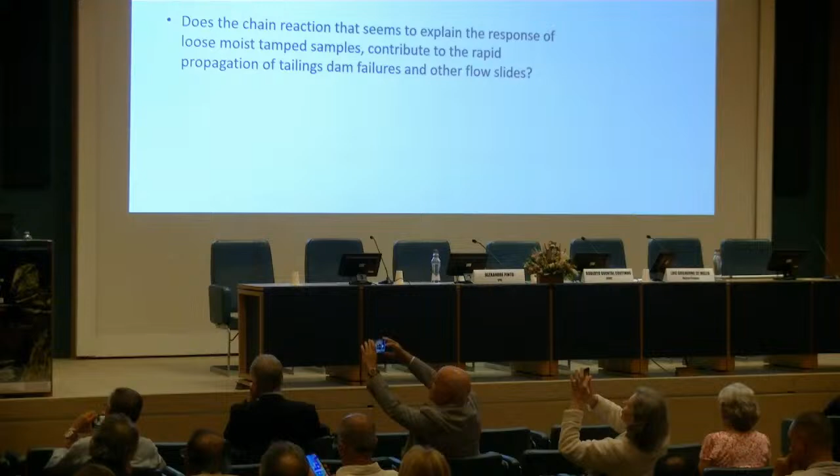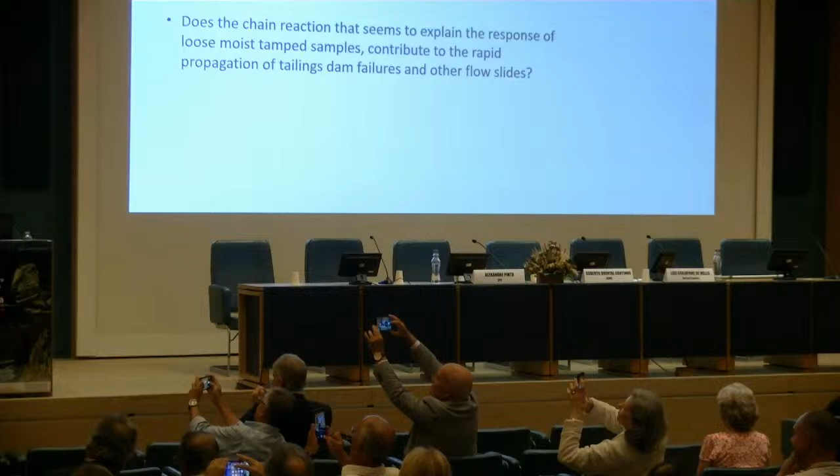I'm going to speak without the microphone. David, I was very touched because you not only raised speculations, but I think you also raised my fears as a professional engineer, about the necessity of how to estimate behavior in the field. Fear has to be added to your title.

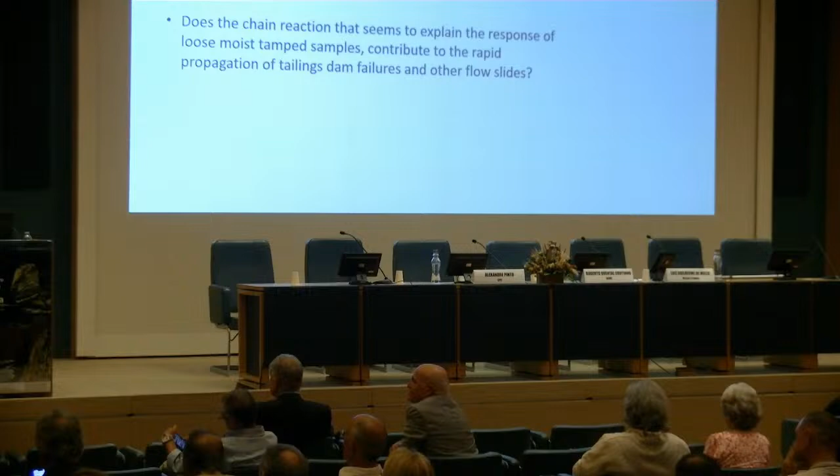I hand you a copy of another very touching token. This is the unfinished book that Victor was working on when the disease came, and he never finished it. ABMS sponsored it, and we printed his handwritings, whatever was typed, reproduced as it was, because I consulted the three first lecturers, John Burland, Harry Poulos, and Mike Jamiolkowski. Your friend John Burland came with a beautiful phrase. I asked them, would you finish the book, since you knew Victor so well? And John said, among the best symphonies are the unfinished symphonies, published unfinished.

So it's a copy of an unfinished book. For those interested, just enter the Victor de Mello website, under his name, Victor F.B. de Mello, and you can download it, you can all have access to it. Brilliant, thank you very much. It's an ABMS token. I shall look forward to unwrapping it. You will at least see some of the figures.

Because there are people outside, sorry, it's okay, I don't need to repeat, right? If you can't hear Lewis, you won't hear me with the microphone. But anyway, thank you very much for attending, and I'm really looking forward to looking at this, together with the book you gave me that you prepared with your sister.

For those who are interested, Victor's biography is also available for downloading on the internet. Just go to the website, or go to the International Society webpage, which also has a link for it to be downloaded.